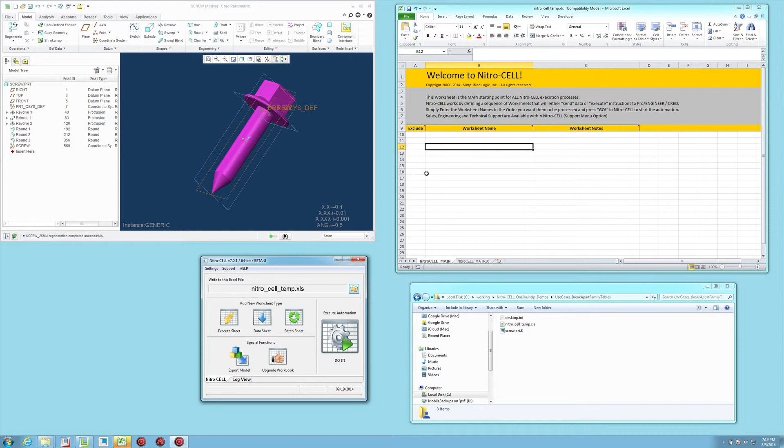Okay, so we're going to try to write a very simple automation process to automate the breaking apart of family table instances to standalone models. So let's say that we have this family table that we've got created here that has all of our library parts in it. We need to break those out into individual models by the name that they currently have.

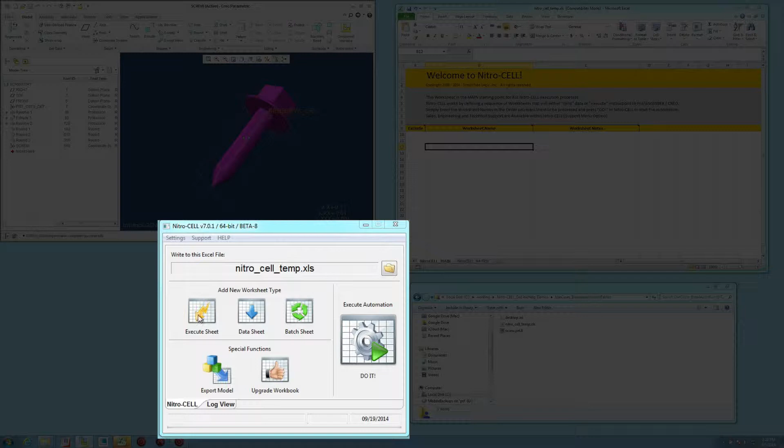So what I'm going to do is start off by first creating an execution worksheet that's going to come off of the Nitro-CELL main. We're using our default template as our starting point here. We're going to say get models is going to be the name of that worksheet, and it's going to add it to the Nitro-CELL main. So that's going to be our entry point into the automation process.

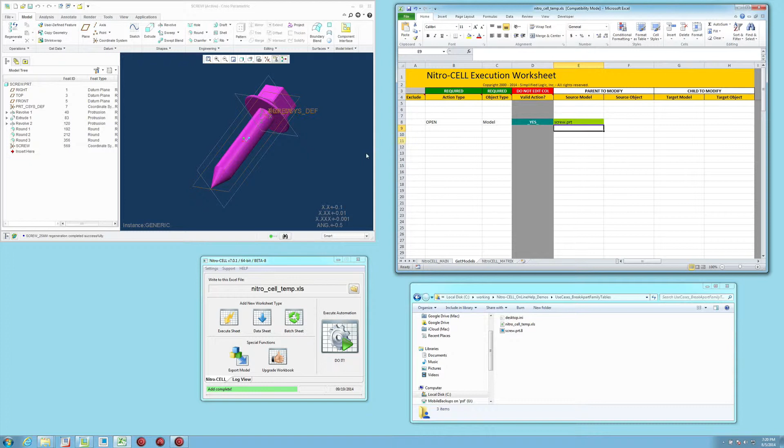The first thing we want to do is open up a model, so we're going to open up screw.prt. The reason we're going to put this in here is that if I wanted to clear memory and make sure that it was gone, if I press the do it button, it will open that up and make sure that I've got the right model that I'm talking to. Otherwise, the rest of these processes would basically assume the active model.

So the next thing we're going to want to do is come in and get a list instances of all of the instances that are within this particular model that's on the screen. So I can leave this blank and assume that it's going to use the current active model, which we can do. Let's scroll over here to see what its expectations are for information.

You can see here that it expects the model, or we can also declare which instances we want to get within it. The target worksheet, which is the batch worksheet that we're going to be executing, and then the worksheet that's going to execute the processes is the last one. So I'm going to tell it to just give me all of the instances, and then we're going to need a batch worksheet for this to be filled out.

So I'm going to create a batch worksheet. I'm just going to execute it as a sub function here, and we're going to call this batch instances. That'll create that for me, so batch instances is going to be where I write the data.

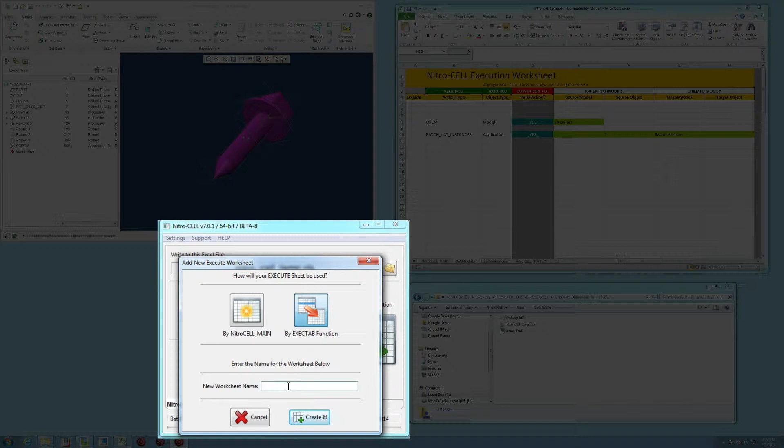And then we need an execution worksheet for what is that batch supposed to do. So I'm going to create another execution worksheet. We're going to execute it from the batch, so we're not going to run it off the main sheet. And we're going to say process instances, and the function here that we're going to complete is process instances.

So what this is going to do is open up the active model that's here. It's going to search for all of the instances, populate the batch instances worksheet, and then process those every time a batch runs. So we're going to fill this up with data, and eventually it will run whatever content we have here. If I run this right now, you'll notice that it connects to the active model and populates this with the list of instances associated with this model, getting it all set up and ready to go.

So if I wanted to take advantage of this, we could actually start off and say application, we're going to erase memory so that we have everything cleared out. Then we're going to open up one of the instances as it's being batched.

And the file name for that, I'm going to pull off of my batch header here. So as our current item counter moves down, you can see that the name will change automatically. And let's put that back just for now.

Once I've got this here, that's basically going to open the model, erase memory, and open the model for every instance that it encounters. So we've almost got this ready to run here.

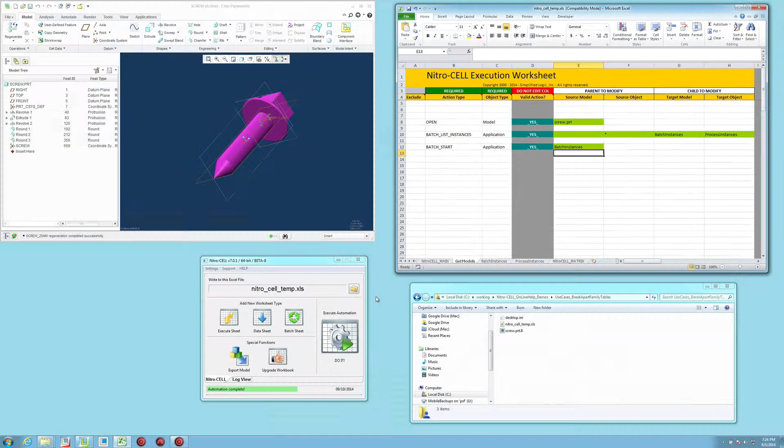And I'm going to use the same worksheet name that I've used for my target. So if I run this now, you'll notice that it is going to loop through every instance that's in the batch sheet and open each of those models.

So that's pretty cool. So if I come back to the beginning here, I want to insert a couple of things. Well, let's just copy this row down here and place that there. And I'm going to use a little bit of a trick here.

So in order to move things around relative to our backup directory that we want, I'm going to come in and actually use a function within the release process that we have. And I'm going to say set nitro release dir.

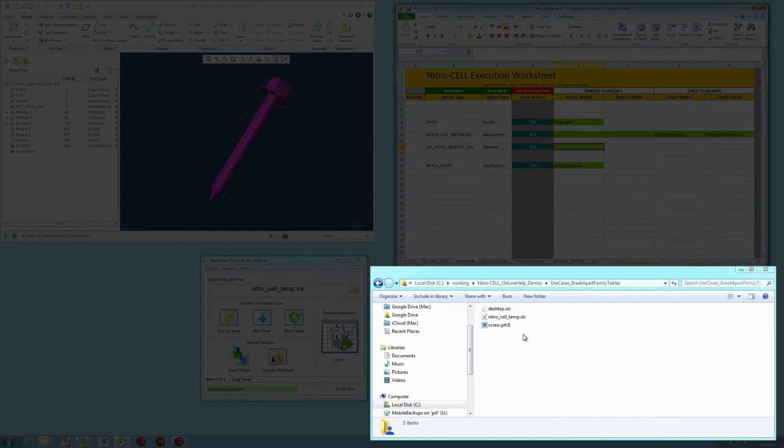What this does is it will automatically create a subdirectory within the working directory. As you can see here, this is where my screw is in my worksheet. And we're going to call this final parts.

So what this is going to do when this runs is it's going to open the file, populate the data, create a release directory, and don't worry, it will re-instance this if we need to as subdirectories, and then it will start the batch process.

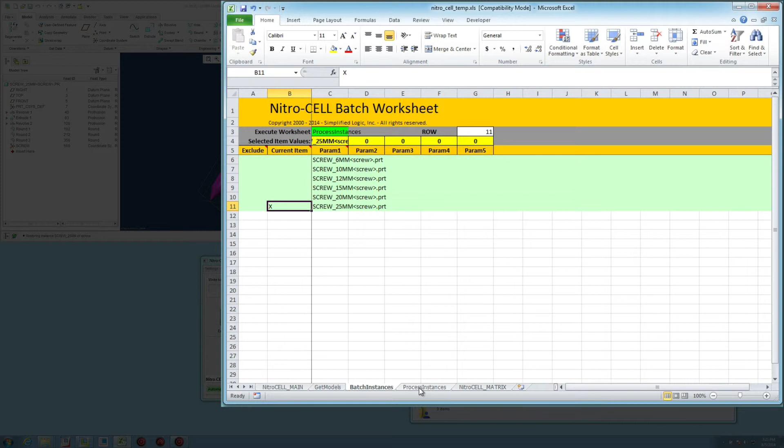So the batch process is going to list out this data and route through them one at a time, and currently it's only opening the model.

So the other thing that we want to do is delete the family table for the source model. So I'm going to come back here, grab my source model. It's going to open up the instance, then go delete the family table for the source model. And then as a final operation, we can say save this to the released directory.

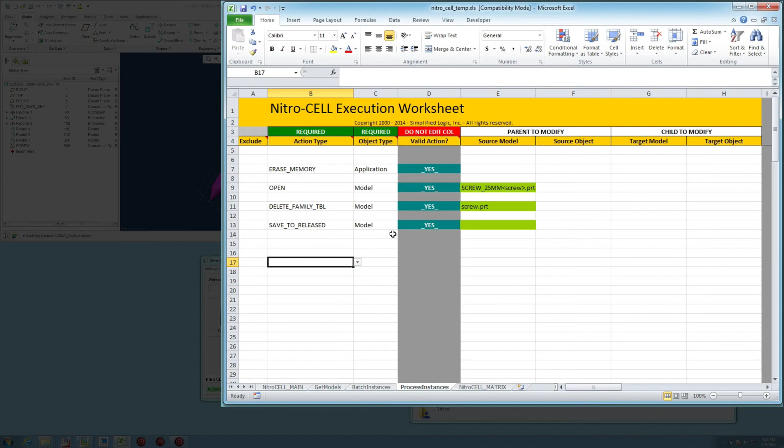So that released directory that we have created, or that's going to be created, this command will actually save whatever is active in the display to that directory.

So when I press the do it button here, it's going to restart the process. You'll notice that it created my final parts directory, and it's already starting to break out each of those instances as it walks through the process, and then it's done.

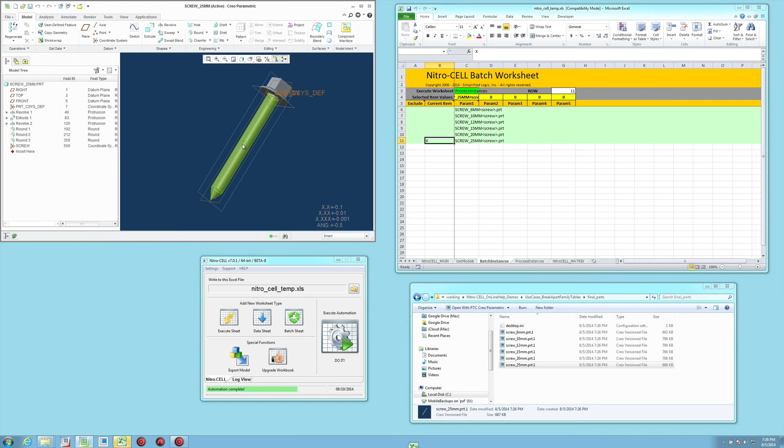So if I pull this model up here, you'll notice that it comes right up. There is no family table reference to it whatsoever.

Whereas if I were to step up a directory and close this out, let me erase memory so you can see, and open up the screw, you'll see that it is in fact trying to pull up the generic. So that's just a very quick example of how to break out family table instances using Nitro-CELL.